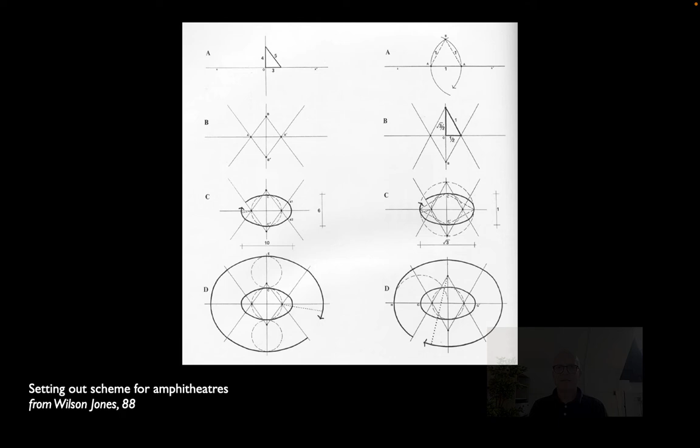And to make the amphitheater, there's a fairly simple geometrical exercise, but it would have been sophisticated for its day, that takes a 3-4-5 triangle and turns that into a series of arcs that guarantee that any seat in the Colosseum would have had a reasonably good view of all of the action on the floor below. This could have been laid out fairly simply with ropes and pegs using just the available technology at the time, but it shows a pretty sophisticated grasp of geometry and suggests that the layout was drawn somehow beforehand, right? That they somehow rehearsed the laying out of the building on the site.

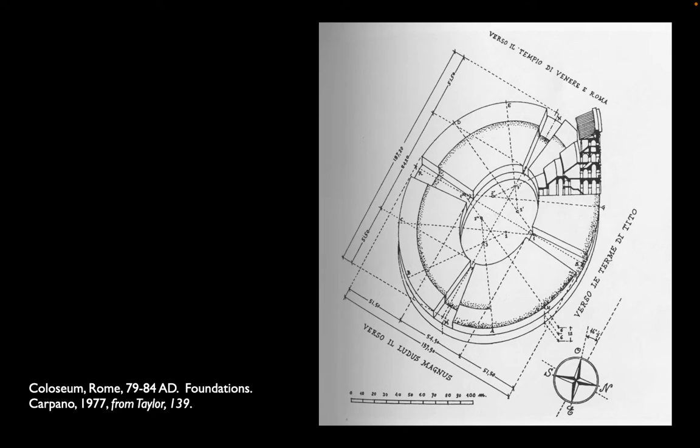And then here's a drawing showing both that 12-meter thick mat underneath the foundation and then a glimpse of the section that we'll zoom in here and look at, but you can see the way that the tiers of seats all relate to this 3-centered or 4-centered oval that forms the geometric basis of the structure.

And so here in section on the left is sort of the programmatic idea, and the idea in part, of course, is you get everyone in and out as quickly as you can, so everyone has a separate arch that they go into. The arches all have numbers on them, so you knew which one you were supposed to enter. And then there are 4 tiers of class, basically, subdivided according to social hierarchy. So the Imperial class gets to sit right closest. It gets to be closest to the action.

And then as you go up, you get lower and lower classes until you get the working class in the top. And they sit on timber seats far from the action, but at least underneath this nice shading device. Each one of those tiers has its own set of stairs, so the classes never interact. That also, though, means that everyone has a very clean escape route, right? Everyone can leave in their own way and has access almost directly to one of the arched entrances on the outside.

The section is also clever, though, because of the way that it stratifies materials. And here, as you can see, there is travertine that clads everything, at least in the original. But then it goes from concrete to brick to tufa as you go up the building. And as you can see, there are no huge spans. And the exterior, the wall is mostly just wall, right? There's just 1 or 2 sets of ringed arches that go around the outside.

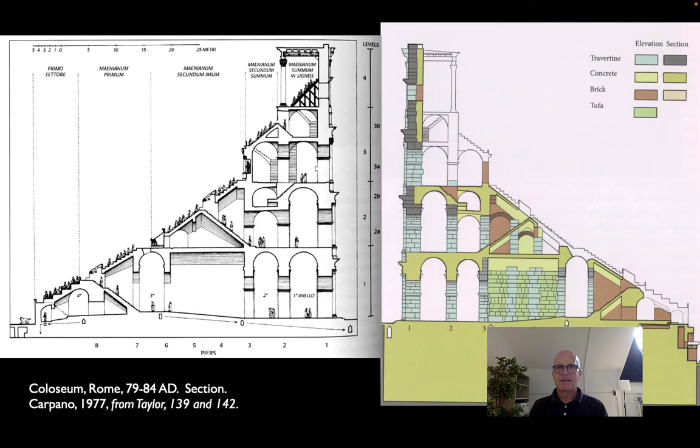But the barrel vault is used extensively, right? Again and again and again to go over these spaces that have to be not gigantic spans, but have to be big enough to accommodate the crowds they anticipated.

And here you get a sense both of the lower and the upper bowl, the stark division between those two, between the Imperial class in the bottom and the riffraff, the cheap seats up above, but also the number of exits from those seating areas. In particular, notice that there are many, many more to get the upper classes out in a hurry. The people in the cheap seats probably have a slightly harder time of it.

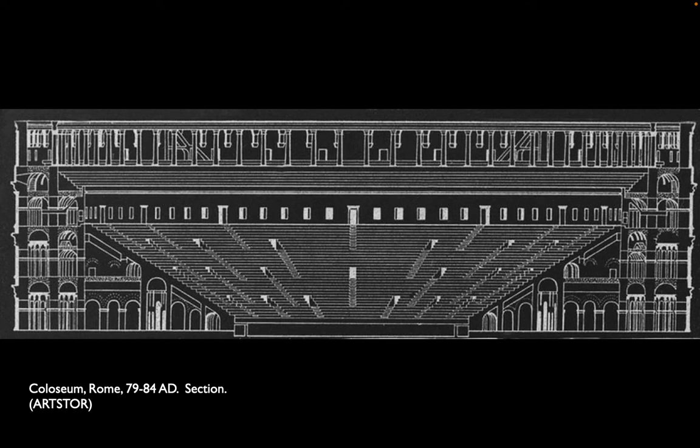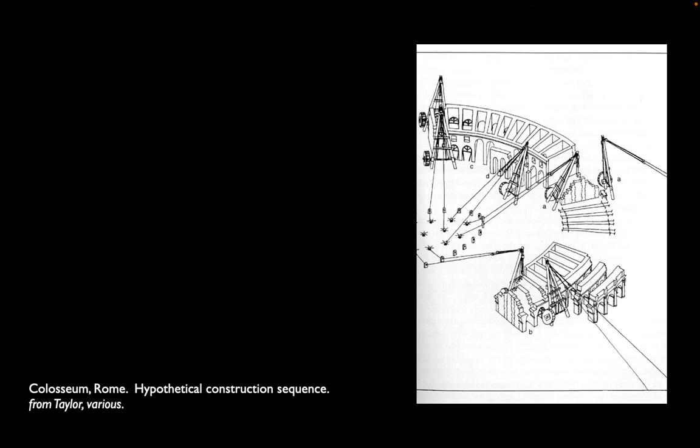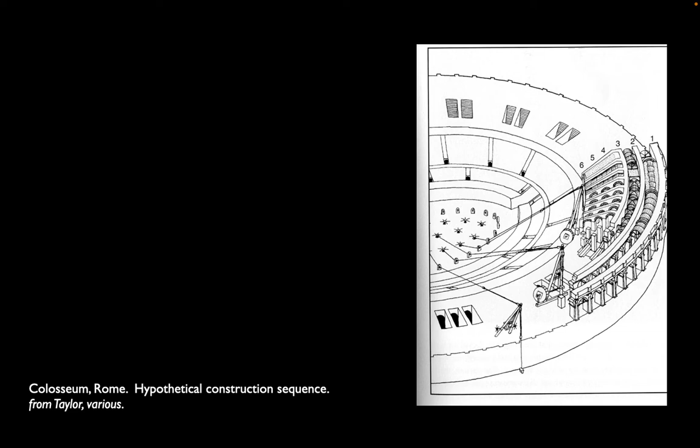How the building was built, we have a couple of ideas about a construction sequence. Rabun Taylor has looked at some of the archaeological evidence and thinks that there may have been a series of traveling jib cranes that built each level one at a time and then essentially climbed the resulting structure, so built the building up and out as they went. And in particular, he notes that there are stones around the outside of the Colosseum that he hypothesizes were the stays for the last ring of cranes.

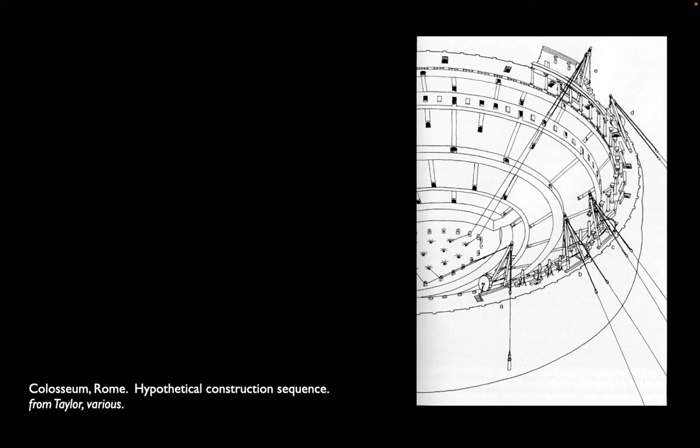So that at the very end they flip the cranes around and they use these stones in the pavement to stay the cranes and to actually lift from inside the building instead of outside. There are other equally valid hypotheses that think that those stones were the stays for a large parasol that provided sun shading for most of the seats and were apparently operated by sailors. There's some textual evidence suggesting that.

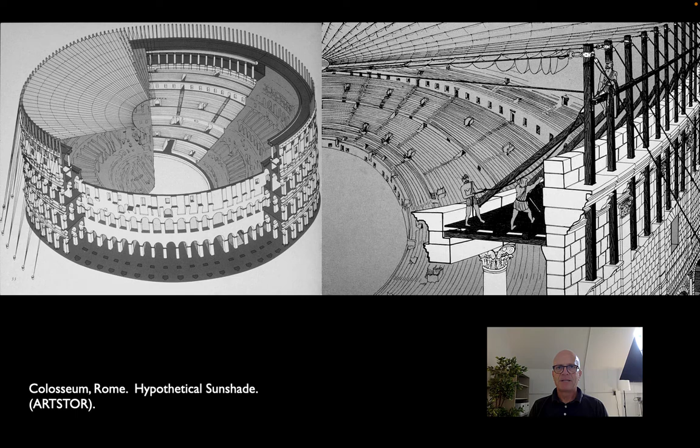Either way, the end result was this gigantic pile of brick, of concrete, of travertine, engineered in several ways, both to allow for good sight lines on the interior, to present a sophisticated classical face to the city, to be a monument that spoke of the emperor's power, and that moved people around in efficient ways. And we look at that section today, we look at the plan, and it fits pretty comfortably with what we know about stadium design and crowd safety today.

The building, of course, had a long and tortuous history. Architectural historians, of course, look at it as a sort of Roman copyism of Greek architecture. It very famously has these 3 tiers of columns going up the outside: Doric, under Ionic, under Corinthian. And this is very obviously window dressing, right? Borrowing the sophistication of Greek architecture to hint not only at how powerful the emperor is, but how learned and how knowledgeable in world affairs, or how civilized the emperor is as well.

The building's reputation in the medieval and Renaissance world was as a martyria. The myth was that this had been one of the sites where early Christians were martyred. There's actually very little to no evidence that took place. But that became the story, and not only was the building pilfered for materials for churches in the Renaissance, it was also consecrated as a shrine, as a church itself, and remains so to this day.